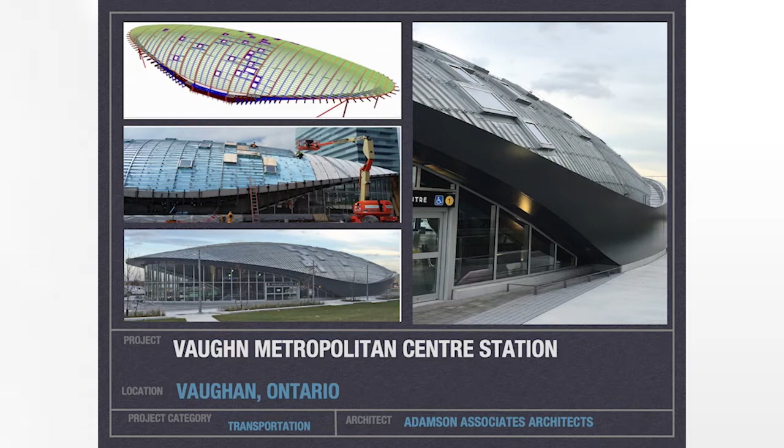Radius Track is also extensively used to achieve curved shapes in interior applications.

And of course, Knotwood is similar to Longboard. Just as the name says, it's not wood, it's aluminum.

We've been doing some Tim Hortons, Wendy's, KFC's, McDonald's, and a strip mall in Halifax, Nova Scotia. We also have battens with Knotwood that achieve great shading and serve as a nice visual aesthetic element.

That was a short introduction to Exterior Technologies Group and some of the projects we've completed around Canada. This next slide shows our learning objective for today.

We want you to really understand the safe use and specification of combustible wall claddings when used in non-combustible construction. Here's a look at our agenda for today.

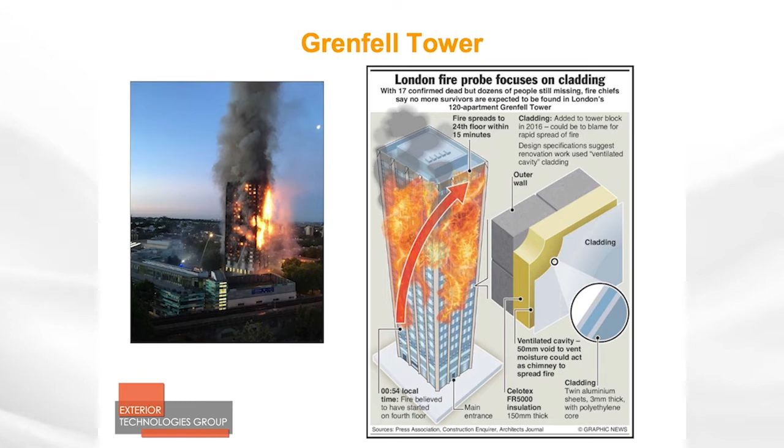So after seeing that slide, why use these combustible claddings? What do they offer? Well, they offer superior rigidity, superior flatness, no oil canning or distortion on the surface. They're really construction site friendly, and they come pre-finished in a wide range of finish options, anything from a wood grain to a prismatic paint to a solid paint. They also have flexible detailing and are very lightweight.

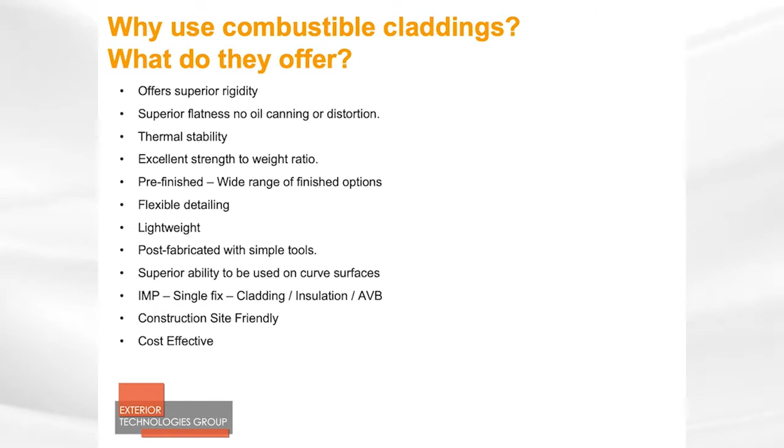Most of the panel systems you see around your cities in Ontario are fabricated locally, and they're very cost effective. So let's get into some of the types of non-combustible claddings.

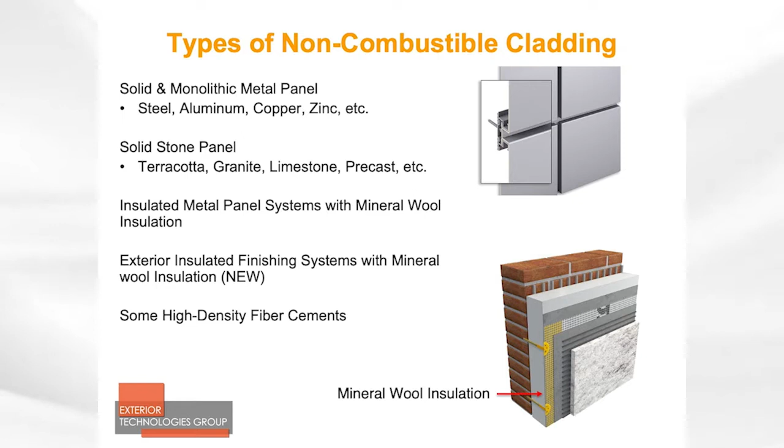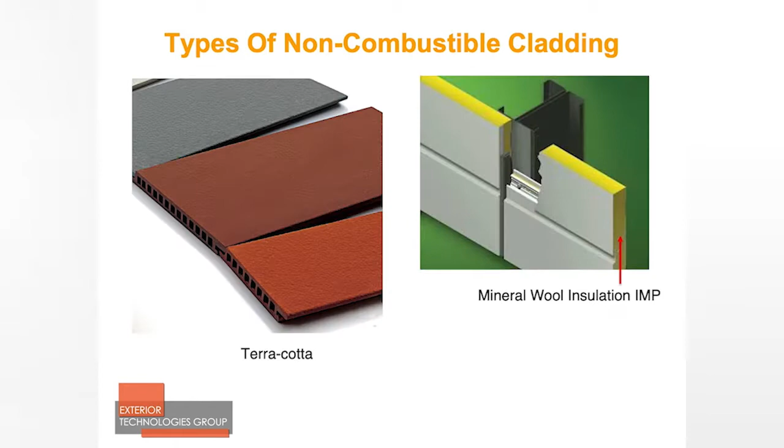The types of non-combustible cladding are solid monolithic metal panels such as steel, aluminum, copper, stone, insulated metal panels with mineral wool insulation, and some high density fiber cements. I'd like to show you some photos and details of these cladding types: zinc cladding, copper, granite and limestone. You'll recognize most of this: mineral wool, IMP, terracotta.

Now that I've introduced you to some types of non-combustible claddings, let's look at those claddings and the materials they're made of, and let's look at the tests required to prove that a material is non-combustible.

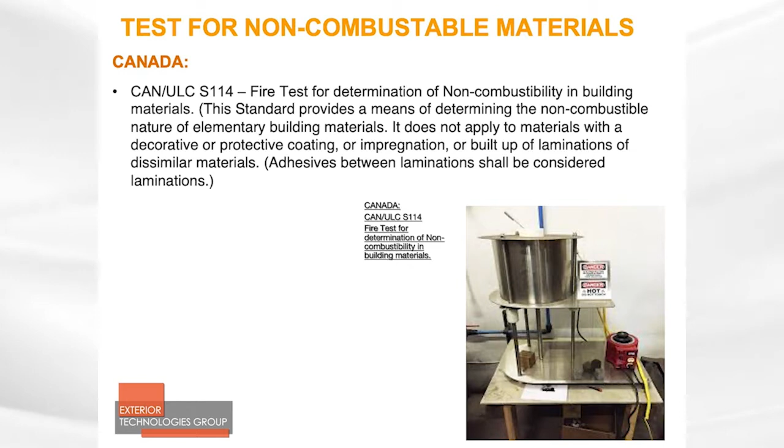Another method in the building code: for a material to qualify as non-combustible, it must be tested to CAN ULC S135. This is an easier test to pass. The S114 was very severe, and nothing could pass it except solid steel or solid stone, concrete, brick, and so on. But S135 is another method which the code accepts to consider a material non-combustible.

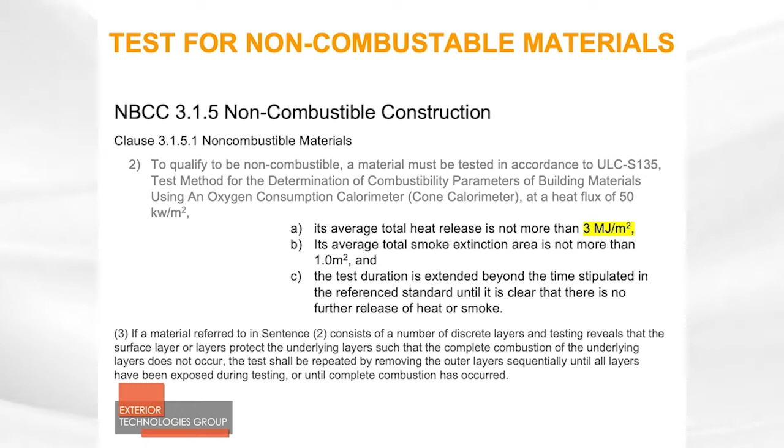So they measure the material going on the wall or being used as cladding, and that material has to have a heat release less than 3 megajoules per meter squared. Now, if the material is a combination or a laminate, with distinct layers like an outer skin, a middle core, and a back skin, all three elements must be tested separately.

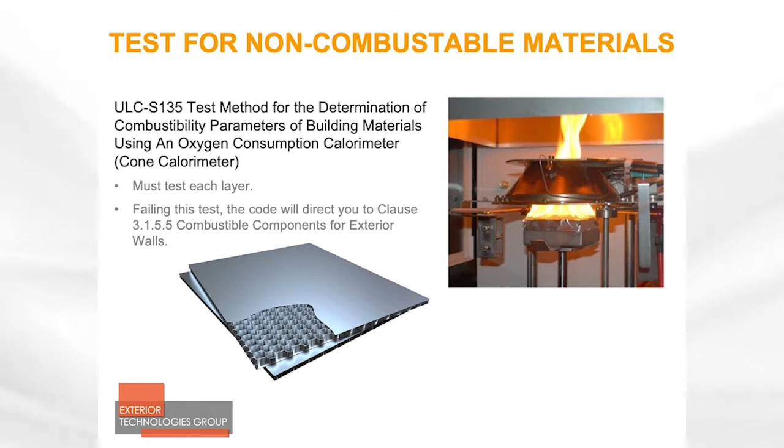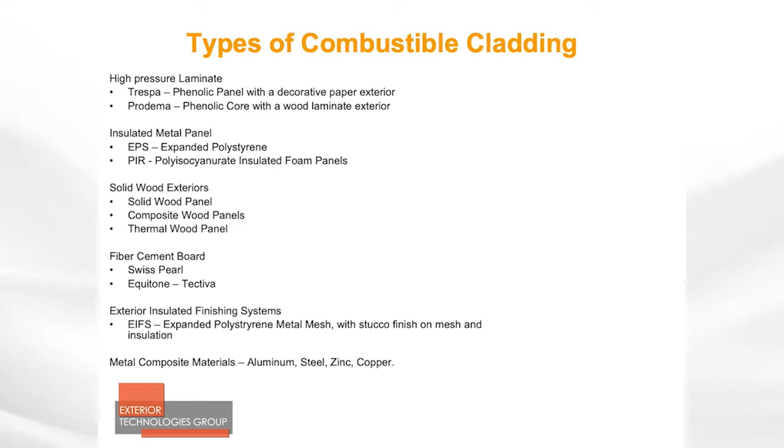Now let's look at types of combustible cladding materials commonly used in construction here in Canada, in Toronto, in Ontario. These types of materials you see daily: high pressure laminates, insulated metal panels, wood exteriors like thermal wood or composite wood panels, some fiber cements, metal composite materials, and so on.

Here's a phenolic panel, for example, a really nice design by Perkins and Will architects. You can see why they selected the material - a lot of materials wouldn't fit into that design.

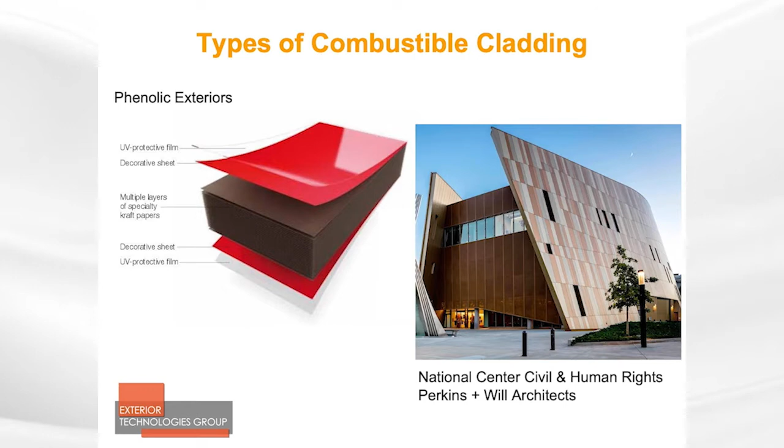Exterior insulated finishing systems, or EIFS, are combustible with polystyrene or polyiso type insulation.

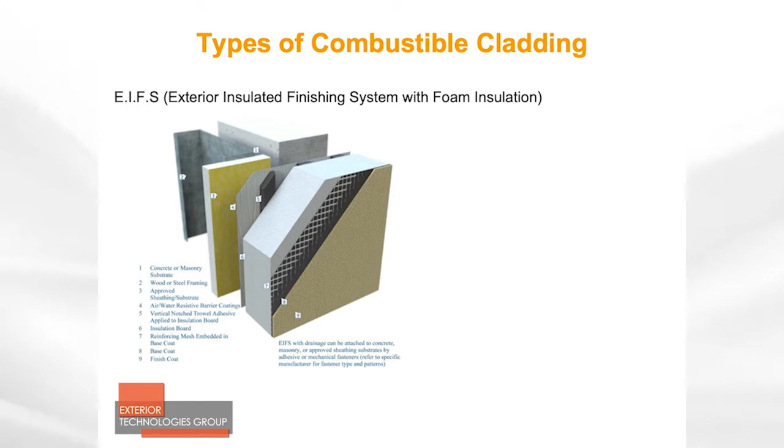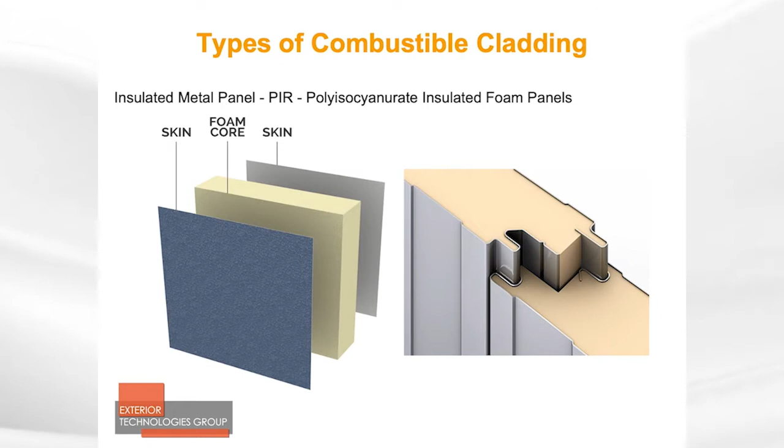Insulated metal panels, which are used in warehouses and so on, as a replacement for precast, sometimes have a very high insulating value, but the skins are made of steel, with a foam core of polyisocyanurate and a back skin of steel.

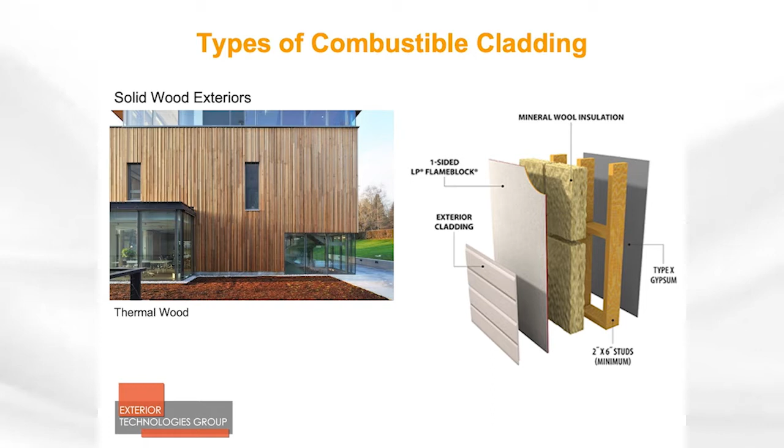Of course, some wood claddings that we're using now - and you as architects love wood claddings - but you have to be cognizant of the code with these claddings. And then aluminum composite materials, such as Alucobond or Reynobond, the trade names, basically a laminate material, also bonded, with an outer skin, a middle core, and a back skin.

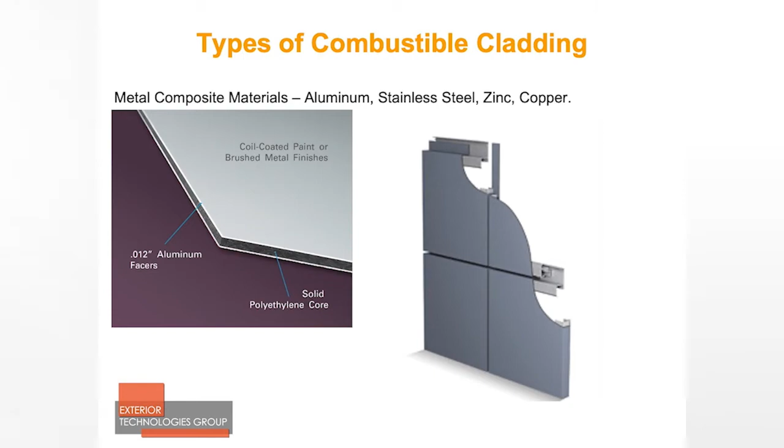Now all these materials have to be tested too. So going back to the previous slides, if you can't pass CAN ULC S135, and if you cannot pass CAN ULC S114, then the code, because we have an objective-based code in Canada, allows it to be used in non-combustible construction, but another test is required - the CAN ULC S134.

It's a full-scale wall test for combustible claddings used in non-combustible construction. And in the building code, going back to those slides, for example, the code asks you to run an S135 to see if your material is non-combustible. If you release more than 3 megajoules, it directs you to this clause in the code, 3.1.5.5, for combustible components in exterior walls.

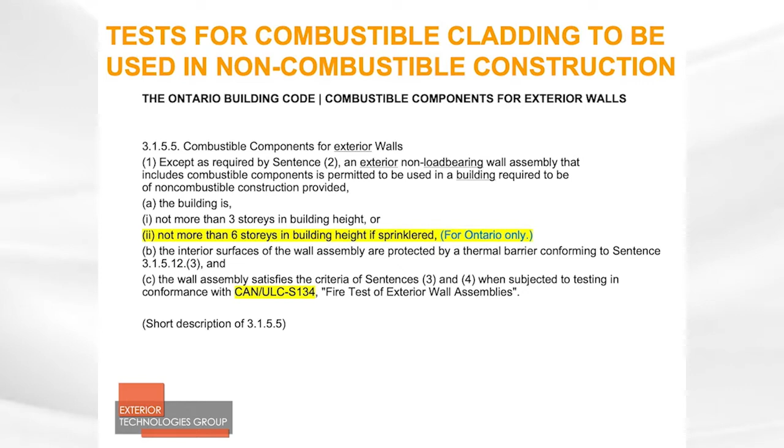In Ontario, combustible components should not be used above 6 stories in building height if the building is sprinklered - that's Ontario only. In the National Building Code, you can use these combustible materials to any height, and all other provincial codes in Canada can be used to any height. That's where CAN ULC S134 is referenced in that section, 3.1.5.5.

Here's a picture of the test. It's not a very clear picture, but we'll see the test in action a little later in the presentation. It's a very big apparatus, measuring about 3 stories high.

We basically light gas burners in the apartment-sized area. It has a window, a large window, and that fire is allowed to propagate out the window and move up the wall. So the only way you would fail this test is if that fire burns the panels more than 5 meters beyond the window.

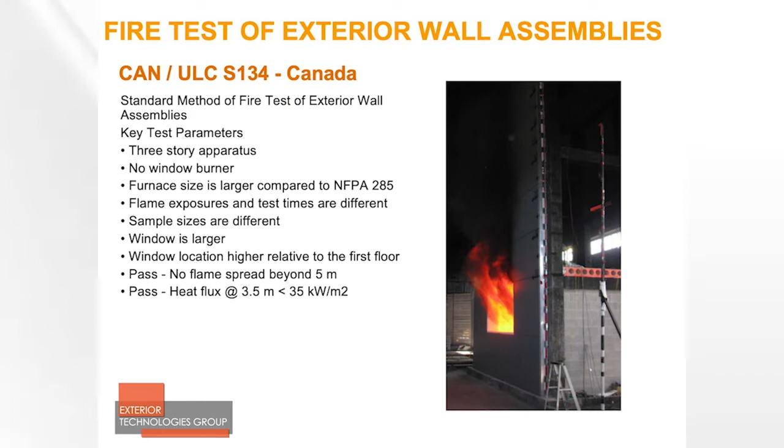And then the heat flux, the amount of heat released by the panels or wall cladding itself, must not be greater than 35 kilowatts per meter squared - then you would fail. What does that test evaluate? I just went through it, but this slide presents it again.

It measures the fire spread over the exterior surface of the wall, the heat flow from the fire plume to the exterior surface of an adjacent building, and the fire spread within the test specimen.

Note that there's a new version of the test from 2013. It's similar to the old 1992 version, except now the panels have to have a joint in the middle of the window opening. Canada's test is probably one of the most severe in the world.

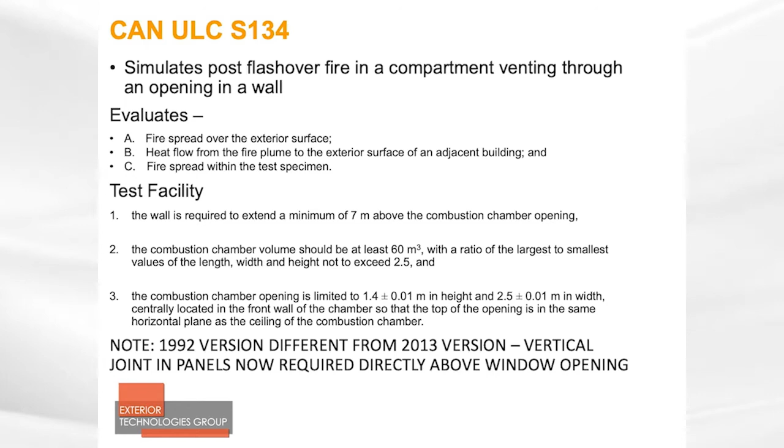Next, I'd like to discuss fire behavior of combustible facade claddings, anything from phenolic to EIFS to metal composite panels.

If you see that graph on the right-hand side of the screen, high-pressure laminates are at the top, and at the bottom are some fiber cement boards. The 256 is the amount of energy that the phenolic panel is releasing. Metal composite panels are somewhere in the middle, and fiber cements are down at 12.8.

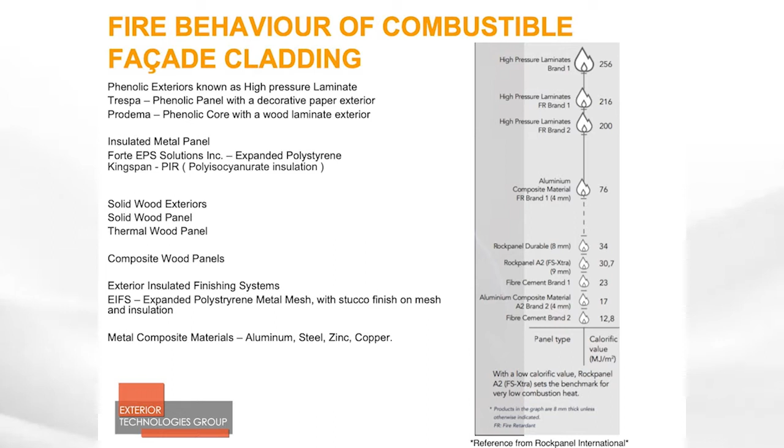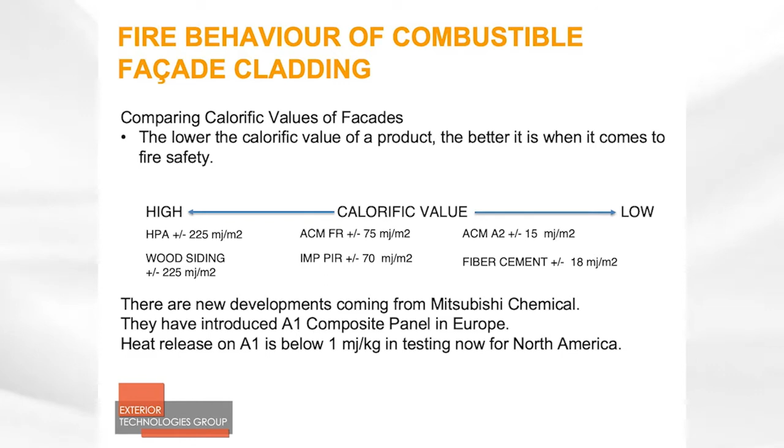The next slide illustrates comparing those values of heat release in facades. Wood siding and high pressure laminates are all around 225 megajoules per meter squared. ACM and IMP type panels are in the middle. There's a new core used in Europe with ACM panels called A2, which has a lower value, and then fiber cements are low. Keep that in mind when you're selecting these products.

Now that we've learned about fire behavior of claddings and energy release, let's look at selecting a combustible cladding in buildings of non-combustible construction. In the design phase, you're going to go to the building code and consider the following.

You're going to look at Part 3, the fire protection and life safety aspect which we discussed. You'll look at structural design of your envelope system, the environmental separations, heating and ventilating, which comes into insulating the wall system, and also Part 12, energy and water efficiency.

You'll also be influenced by municipal planners, zoning requirements, and the National Fire Protection Association, NFPA requirements.

In the design phase, you're also going to look at the grouping or classifications of your buildings. For example, Group A Division 3 is arenas, Group C is residential or multi-unit residential, and Group B Division 1 is detention centers.

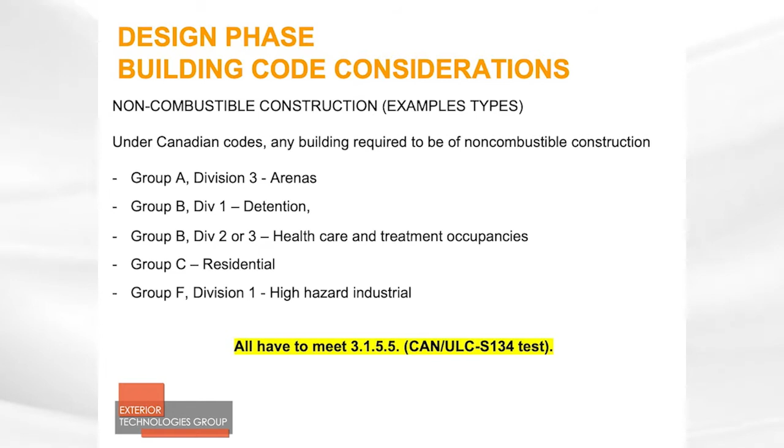In those areas of the code, you'll be directed to either use a non-combustible building product and material which meets S114 or S135, or if you choose a combustible product, the code will direct you to 3.1.5.5, which references the CAN ULC S134 test we discussed.

After you've designed and specified the material and the proper testing it should go through, and you're in the construction phase, communicate with the contractor and look at the shop drawings and assembly. Review the material being used, make sure if it's a combustible type material on the wall system it meets S134 and they have a test for it. Better yet, if they have a listing, that's even better than the test.

Check that the material on site is consistent with the shop drawings. You're getting the FR core, which is a white-gray core, and not a PE core of the cladding material, which is a black core.

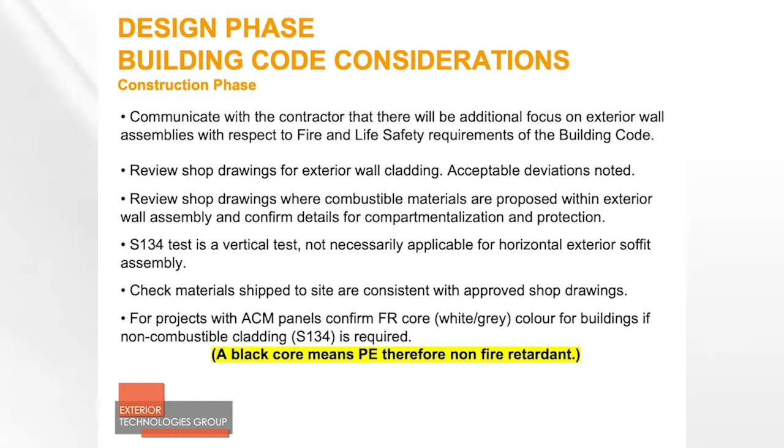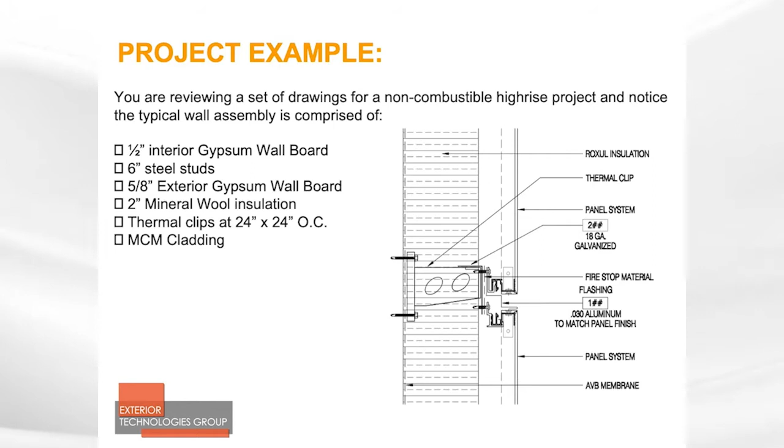Here's a project example. Half-inch interior gypsum wallboard, 6-inch steel studs, exterior grade gypsum, and the thermal spacer attached through the exterior grade gypsum into the stud wall. You could have 2, 3, or 4 inches of mineral wool insulation, a thermal clip, and then the MCM cladding system.

Now let's define that project example in detail. When reviewing the shop drawings, make sure they conform to what has been tested or listed. Reject the design if it fails to meet the S134 assembly you're looking at.

Look at all the additional minor combustible components, such as thermal clips and so on. If there's a significant difference or deviation from the tested assembly, get with your code consultants to see if an engineering judgment may be required to approve the wall assembly.

In Ontario, we have what's known as an alternate solution in the Ontario Building Code. As we learned in past slides, combustible materials in Ontario can only be used up to 6 stories. But since we have an objective-based building code, you can apply to the local building officials for an alternate solution to use those materials above 6 stories.

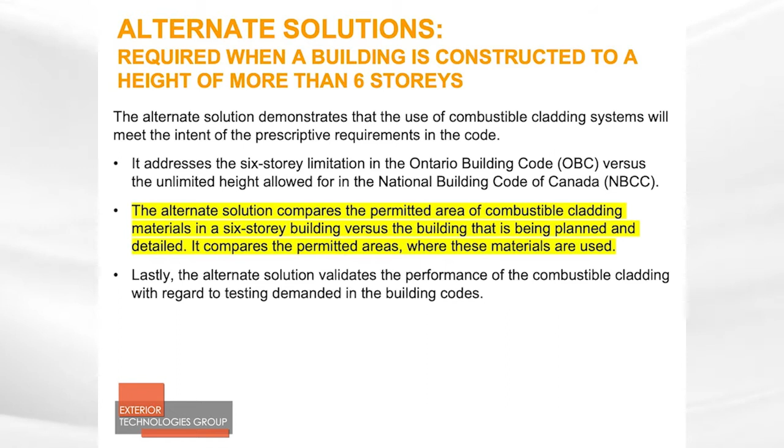So what does the alternate solution do? It compares the permitted area of combustible claddings in a 6-story building versus the building being planned and proposed. Lastly, the alternate solution validates the performance of the combustible cladding with regards to testing demanded in the building codes. These alternate solutions are typically done by fire code consultants.

LRI, which is one of the best code consultants in Canada, has done a few of these projects with us.

In this segment of the presentation, I want to discuss briefly trends in wall construction and how the Energy Code is really clashing with some parts of the building code, especially life safety and fire in terms of Part 3.

The Grenfell Tower example is a great example. They used polyisocyanurate insulation, which is a foam that offers great insulating value but burns. These systems really have to be tested, which that one was not, with polyiso and aluminum composite panel.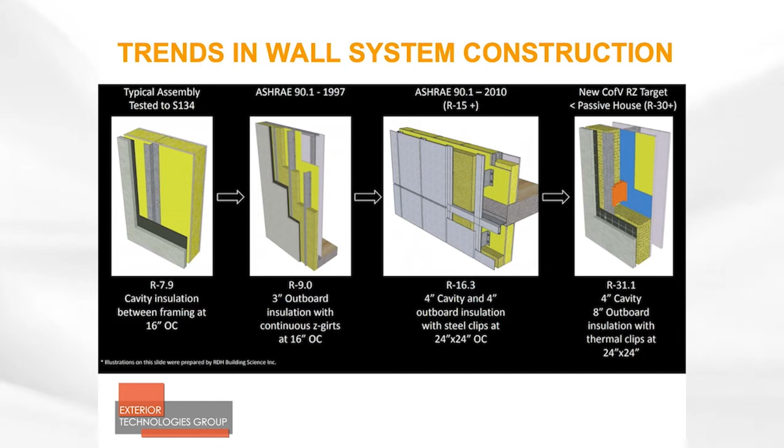The other trend we're seeing is fire barriers or cavity barriers within the rain screen system. These barriers could be vertical or horizontal. Vertical barriers are found mostly at building corners, and horizontal cavity barriers are often designed to be 2 to 3 modules in height, to stop any fire propagating up the cladding.

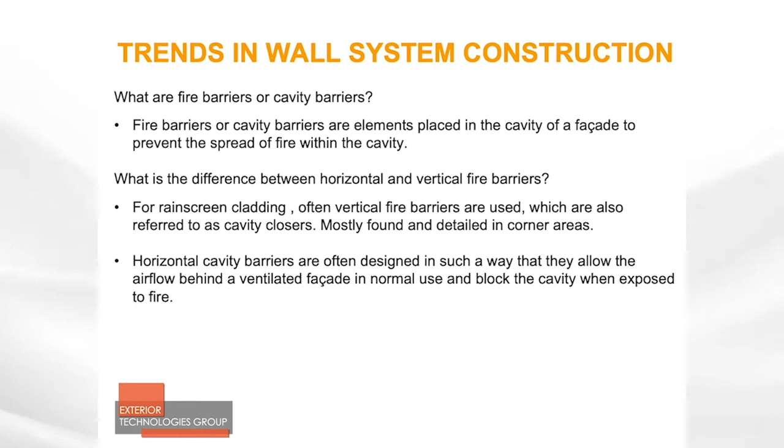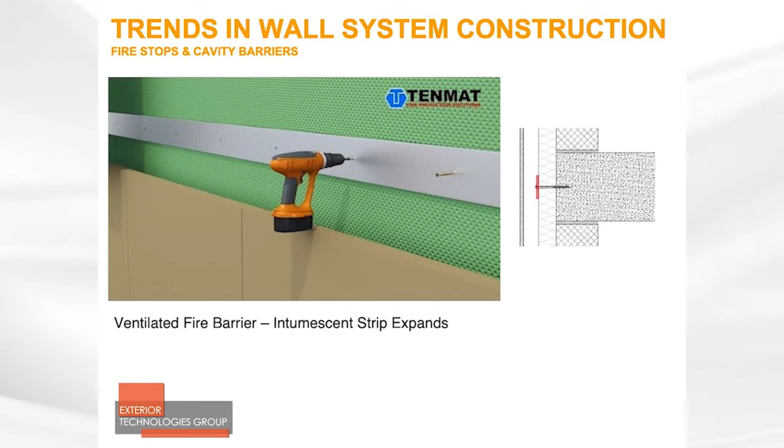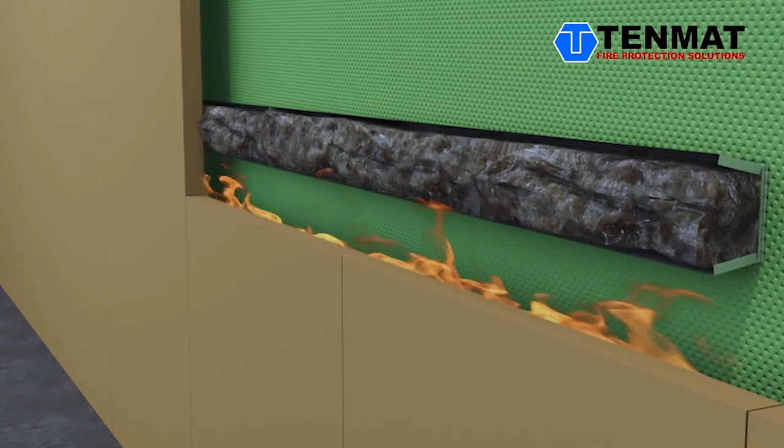It is an intumescent strip fixed to the substrate, and when that strip detects a rise in temperature, expanding insulation like mineral wool insulation will expand into the cavity and form a fire break. These fire stop developments will add to typical attachment systems.

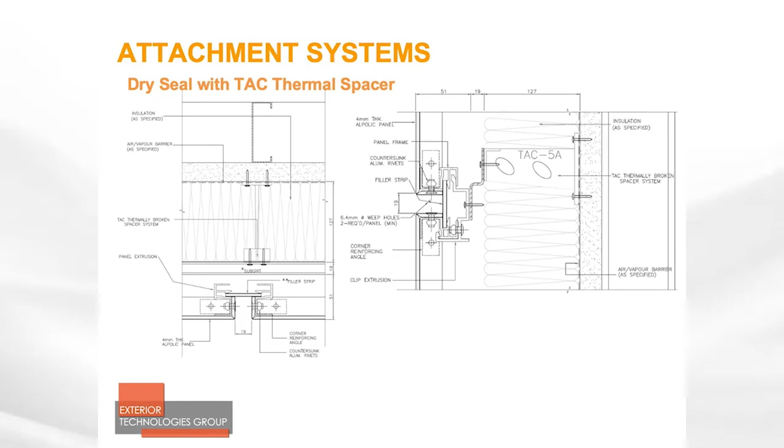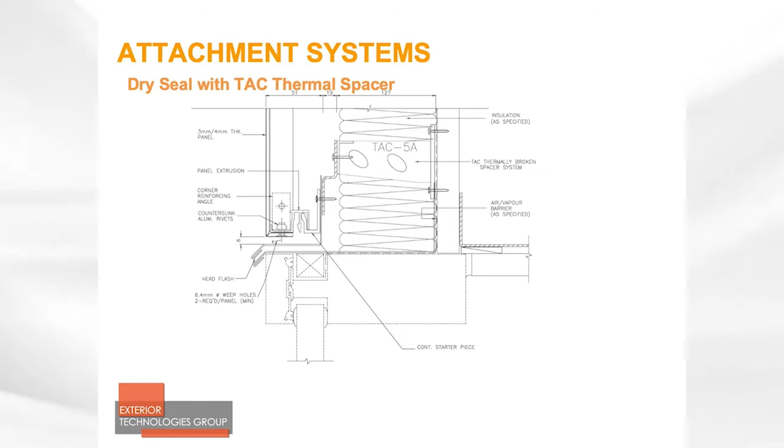Some typical attachment systems here, as we discussed in the presentation: this is off a steel stud, exterior grade gypsum, the insulation panel system. This is a horizontal and vertical joint with a thermal spacer, and this is an actual picture of the thermal spacers being installed with the mineral wool insulation.

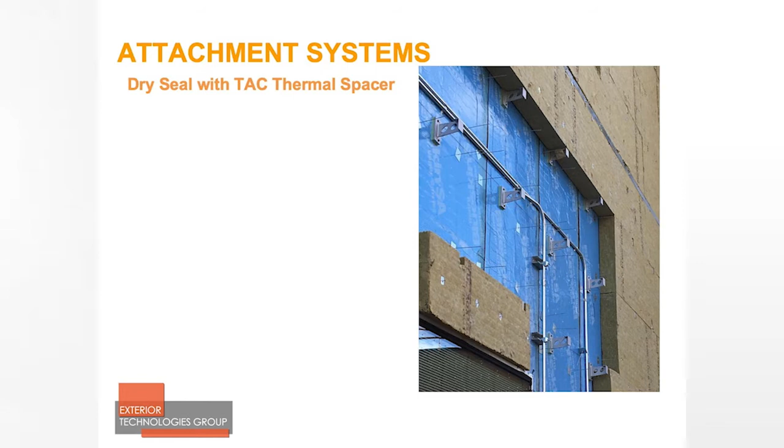Now, the last thing that I want to discuss in the presentation today is really to reinforce the tests for combustible and non-combustible claddings.

In Canada, what you should be specifying and what you should see in your specs when specifying these materials is that the material is tested to CAN ULC S102, which is a surface burning test that measures smoke development and flame spread.

S102.2 is a test method for determining flame spread and smoke development in ceiling and soffit applications. In fact, if you remember that picture of the Ryerson Student Center, we actually had to peel the aluminum skins off the composite material and test it to S102.2 to make sure no dripping of the core occurred.

CAN ULC S114 is the test for determining non-combustibility in a building material. S135 is another test for determining combustibility parameters in a building material. And S134 is the standard method for fire tests for exterior wall assemblies.

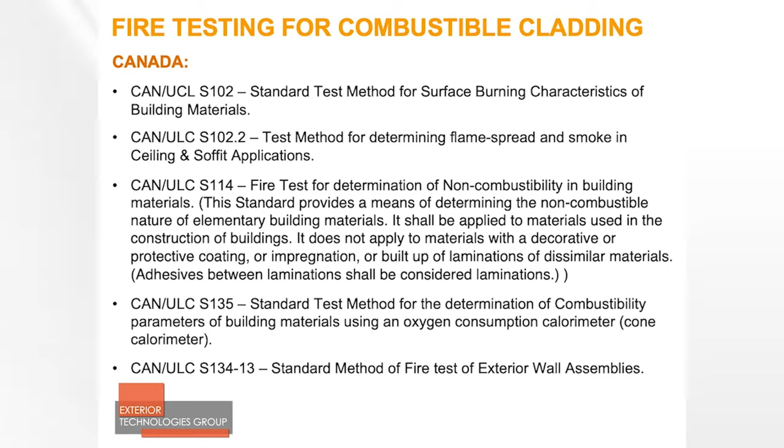Because we're so aligned and so close to the US border, and a lot of materials flow back and forth across the border, it should be noted that the US tests are similar but not equal to Canadian tests. Mostly the Canadian tests are more severe, but this slide just illustrates the US test and how it's similar but not equal to the Canadian test.

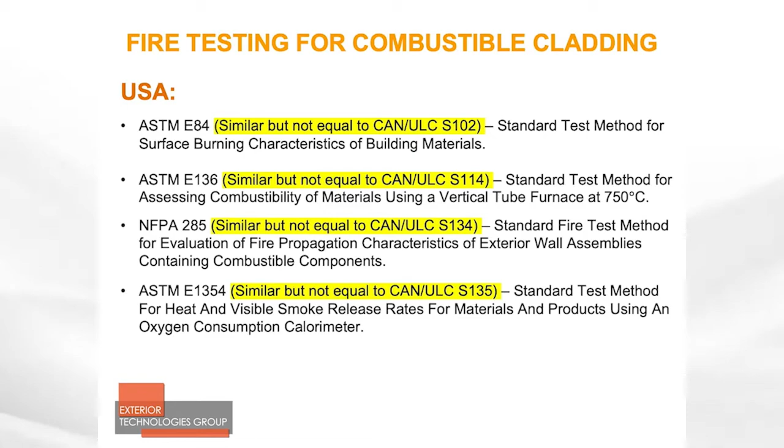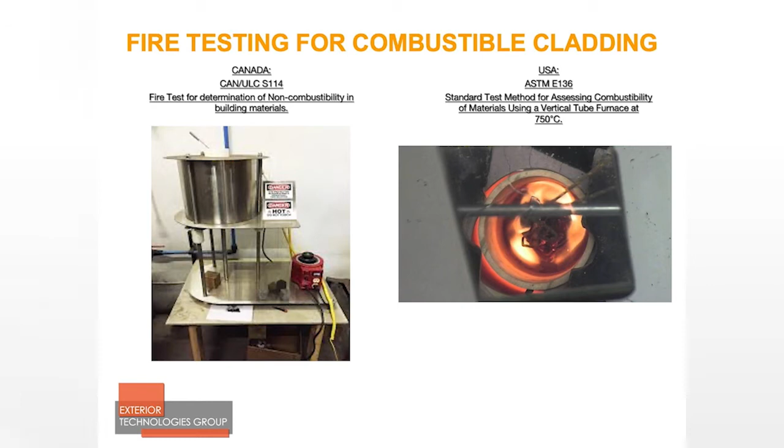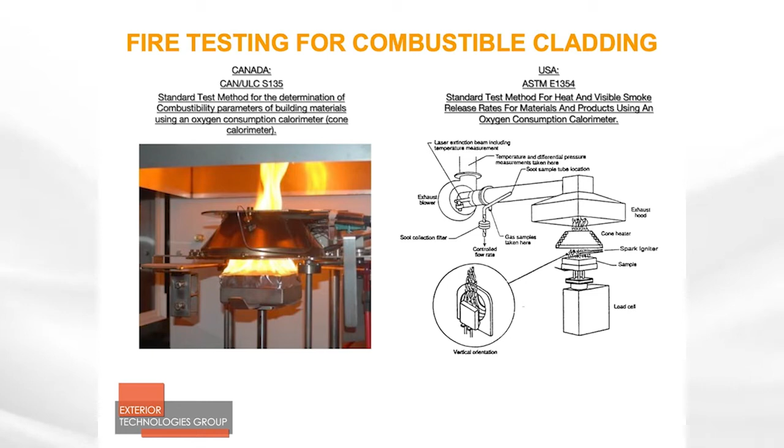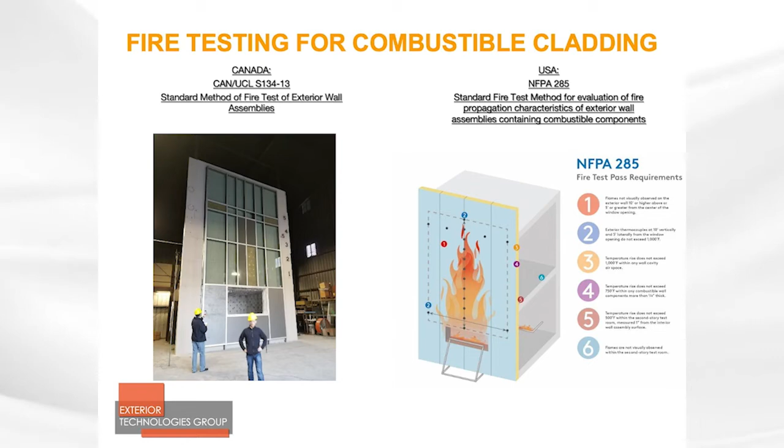Like I said before, the Canadian test is one of the most severe in the world in terms of heat output and fire output in the test. The NFPA 285 has lower values of fire output and heat output.

Just some points to remember at the end of the presentation: no wall system that is tested in accordance with S134 is exactly the same as what you will be building and detailing on site.

FR, when you see FR in a specification, means fire retardant, not fire resistant. It means the material is still combustible.

Non-combustible products are usually monolithic in structure and their makeup, whereas combustible claddings are usually made up of different types of laminate cores, like an outer skin, a core, and a back skin. So that's our presentation for today.

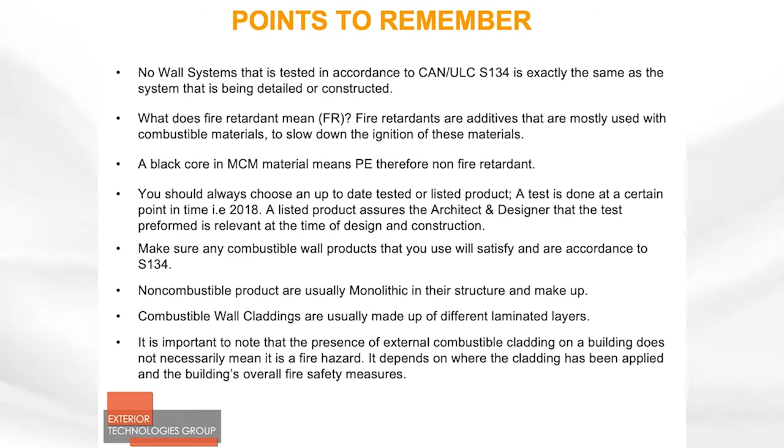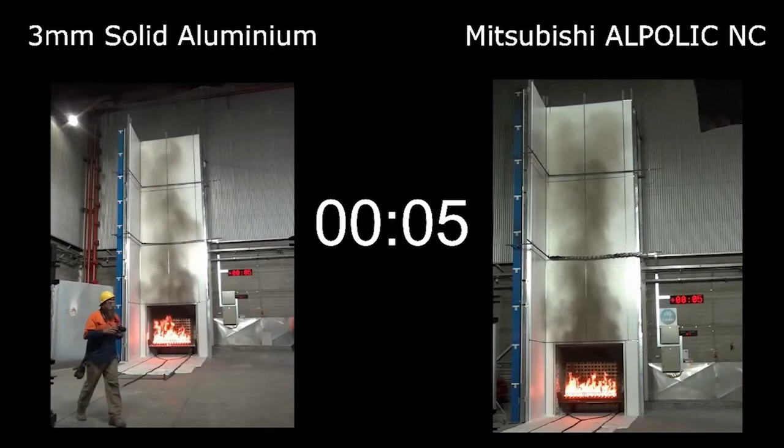I'd like to run a short video. What we're looking at here is solid aluminum plate on the left-hand side of the screen, and Mitsubishi Alpolic NC on the right side of the screen.

I want to show you this video just to illustrate that this is an Australian test, but 3 mm solid aluminum plate under these severe tests reacts almost the same as Alpolic NC, shown on the right-hand side of the screen.

See the fire propagating up the aluminum plate as well as the composite material. What's funny about this is the aluminum plate actually fails—the solid aluminum plate fails because the fire is so severe that it melts the aluminum fastening, about 17, 18 minutes into the test. You can see both materials reacting in a similar fashion, and the fire is quite severe. But these tests are run for about 30 minutes, and the reason is that gives ample time for the fire department and the local municipality to get to the fire and extinguish it.